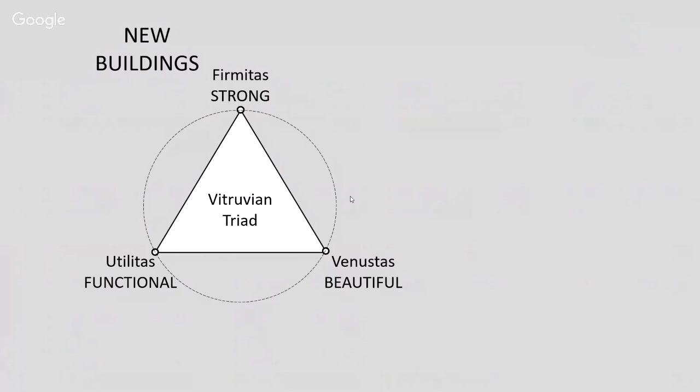Although he was the architect of the emperor, so he didn't have much concerns about the cost of the building. And also, they were not concerned about the environmental impact or energy efficiency or the sustainability of the building. So maybe a new rule can be added in our recent world that a building should be sustainable, which translates as it should be economic, cost efficient, energy efficient, and environmentally friendly.

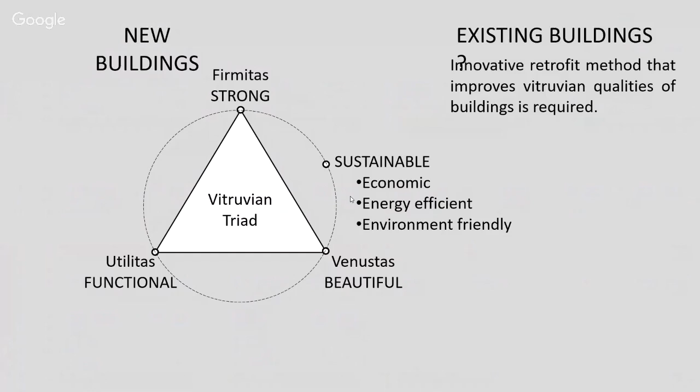While this is true for new buildings, how about the existing buildings? Maybe an innovative retrofit method that improves these qualities should be required, because generally when we retrofit a building, we interfere with the building too much. And although the building becomes stronger, it is not necessarily economic or energy efficient when we use conventional retrofitting methods. So which type of buildings should be retrofitted?

In our studies, we generally concentrate on governmental buildings, like schools, hospitals, or other types of governmental buildings, because these buildings are more important than other buildings. I don't mean that residential buildings are not important, but what I mean is during a disaster, a school contains lots of students. They're important for us. And after a disaster, a school building can be used as a shelter.

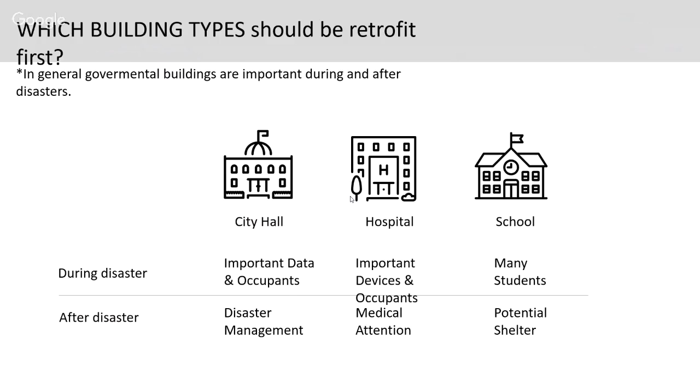So that's why these buildings have priority to be retrofitted. Let's start with an example. This is a very typical school building in Turkey, and there are thousands of similar buildings built with similar plans in many parts of Turkey.

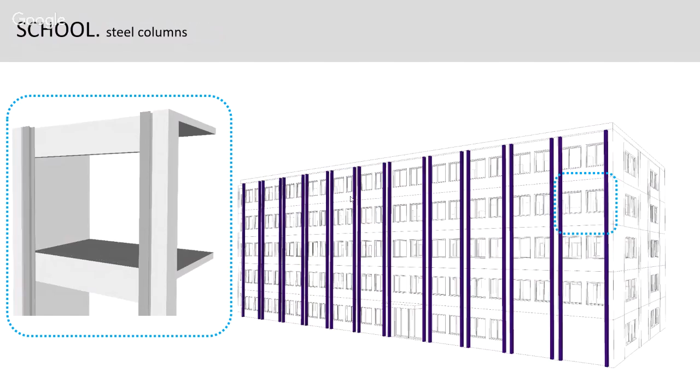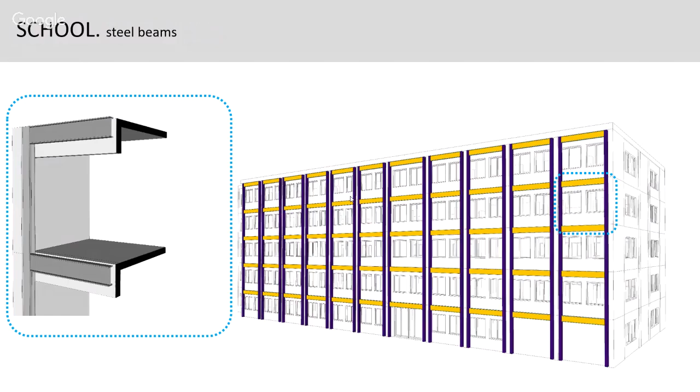So what I mean by external retrofitting is this. Say, this is the model of the building. First, this is one of the options: we install steel members along the columns, the existing columns of the building, from outside, and then the beams are introduced. These are steel beams also attached to the existing beams of the building, also from the outside of the building. And then, in this example, this is a buckling restrained brace, a special type of brace which can dissipate seismic energy during an earthquake motion.

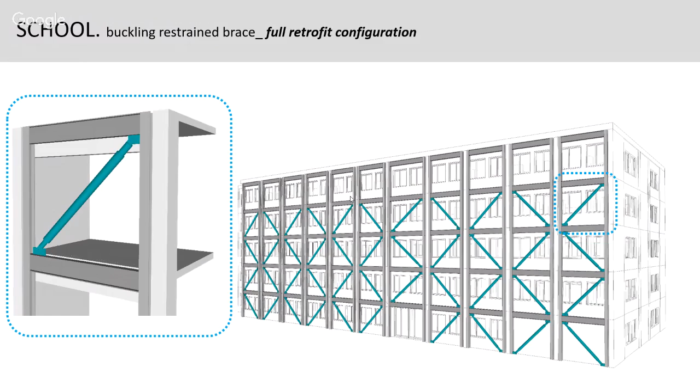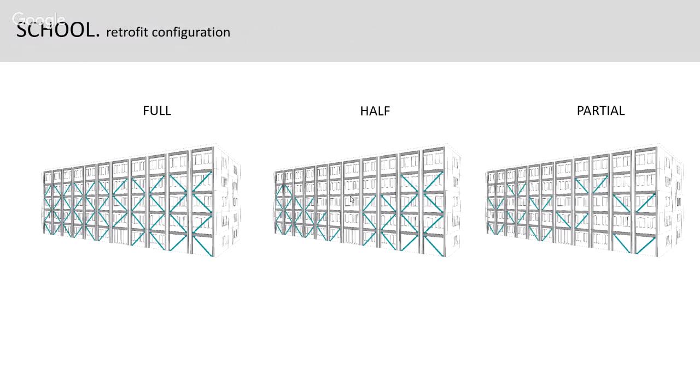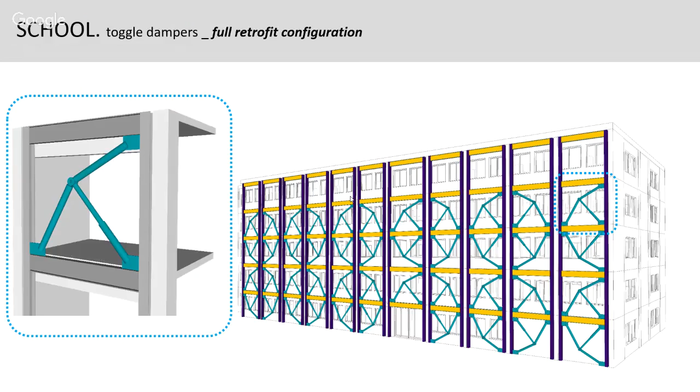External retrofitting improves seismic performance and makes minimum interruption to the occupants or business in the building. If it's a school, it can keep working as a school. If it's a hospital, it can keep working as a hospital. There is a slight noise problem, but with new tools we can reduce the noise during application.

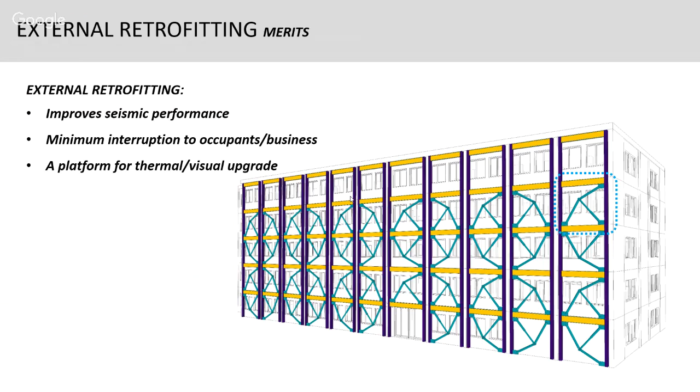This can also be a good opportunity to improve the thermal performance and visual appearance of the building, since we have already installed a new facade. This is actually a new opportunity: now that we have new construction outside the building, we can add a new facade to improve its visual and thermal performance.

This is one example completed at Istanbul Technical University, in collaboration with Tokyo Institute of Technology, Takeuchi Lab, and Nippon Steel as the manufacturer of the BRBs. This frame is the same frame, in almost the same scale as the school building I just showed you, using the same materials and aspect ratio. BRBs are installed in this frame, and seismic motion is simulated using this experimental setup.

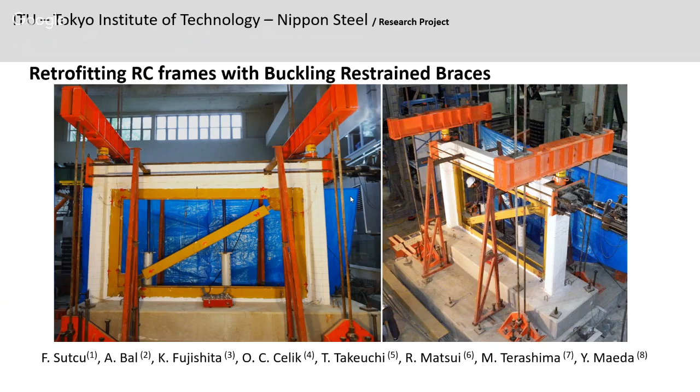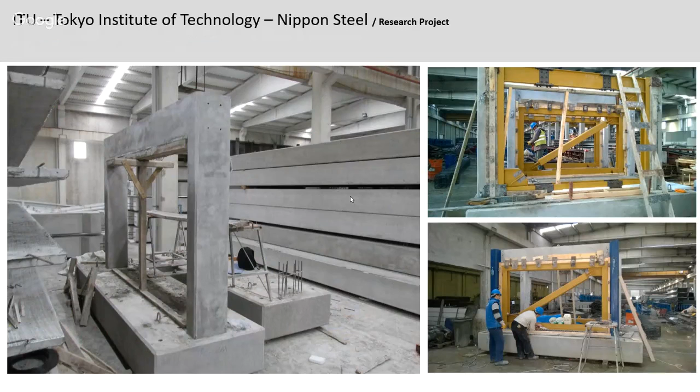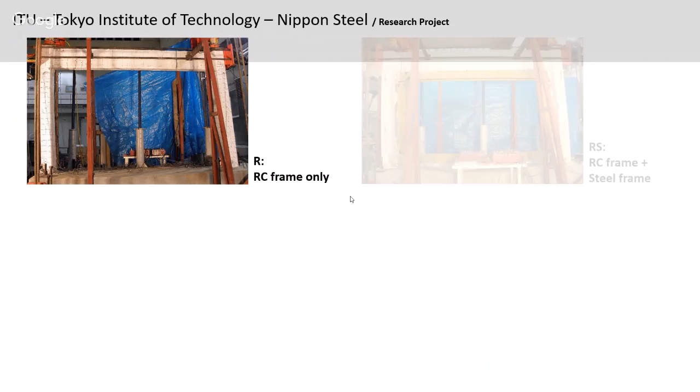We built these frames in Turkey using Turkish technology, just as they were built in Turkey, while all the BRBs and steel members were imported from Japan for this project. First we tested the RC frame only, then added the steel members and tested again, and then the BRBs were added.

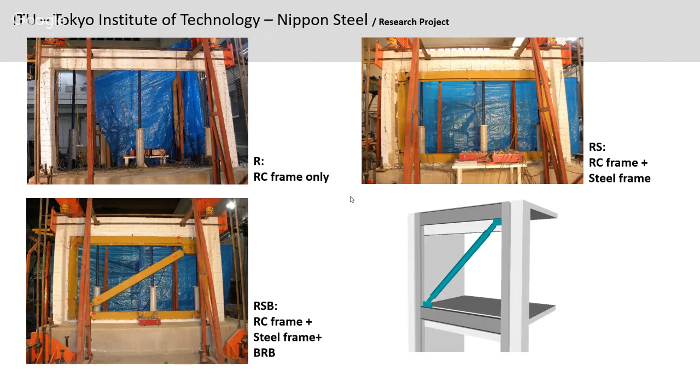Another application: this frame is concentric within the building frame, within the building plane. We can also use an external type, like this one, where you can see the frame added from the outside of the existing frame. And these are the performances.

I won't go too deep into this, but you can see that in the RC frame, the stiffness is quite low. After the steel members are added, the stiffness gets higher and shows some energy dissipation. Later, when the BRBs are introduced, the seismic energy is dissipated by the BRBs, and when the BRBs are introduced externally, the performance is more or less the same.

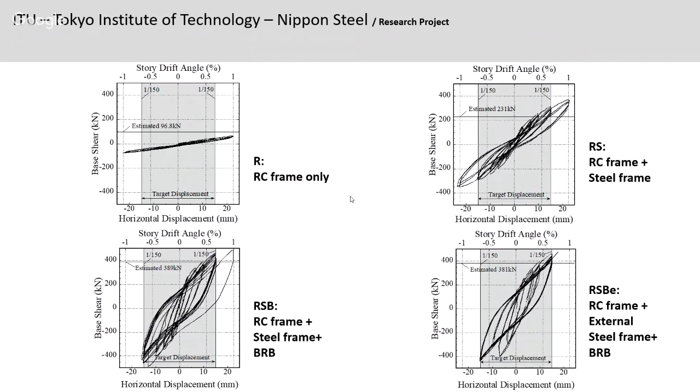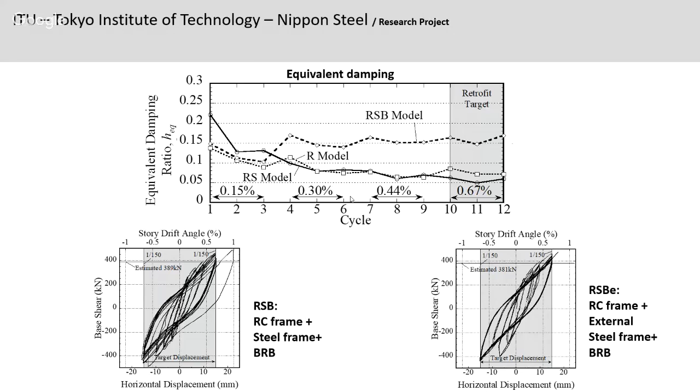This is an example about the equivalent damping. Before the retrofit, in the reinforced concrete frame, the equivalent damping is approximately 5-6%. After the BRBs are introduced, approximately 15% damping is added, which is quite valuable during the design of this building and retrofit studies.

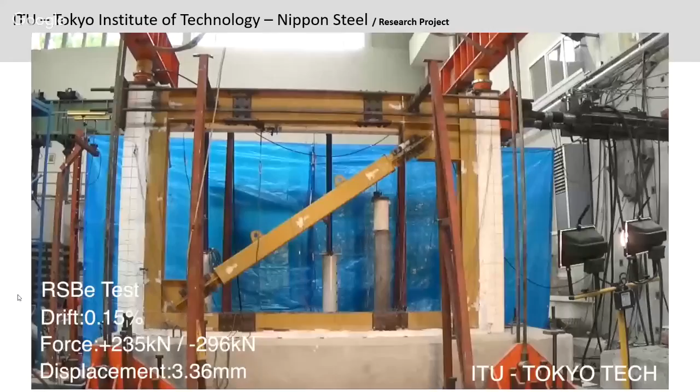I will show a small video of the BRB tests. Here, during the loading, you can see the BRB has a steel core inside the tube, and it stretches along with the loading protocol. Here we have reached almost 1% cycles. Here you can see the stretch. All of the energy is dissipated by the BRB core, the steel core, and you can also see the cracks distributed along the reinforced concrete members.

Here is an application in Japan, at Tokyo Institute of Technology, the Midorigaoka 1 building. I worked on this building for almost 2 years. This building was built around the 60s. The concrete quality is questionable, and the structural system is fairly good, but it needed retrofit.

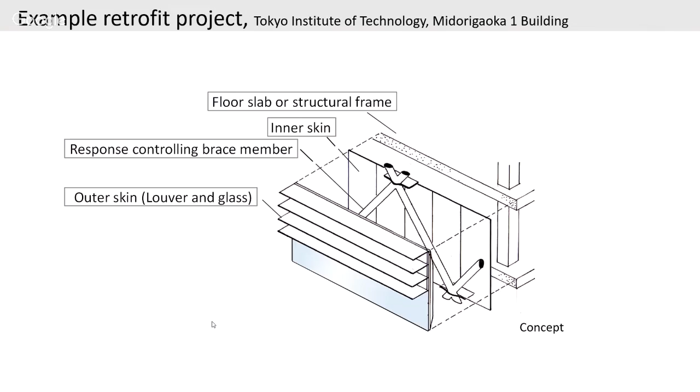The proposed method was to add BRB members outside the building along with some louvers, which improve the thermal performance and also the visuals of the building. These are some application photos, and this is the final condition of the building. Now this building is safer and stronger, but I believe it also looks more beautiful, which is proven by a design award given to this building, shared by two professors in Japan. I use these images with the permission of Professor Takeuchi.

By using louvers, this is not seismic, but it's an opportunity to improve the thermal performance of the building. In summertime, the louvers cut direct sun radiation, but in winter, they let more sun radiation inside the building, increasing its thermal performance.

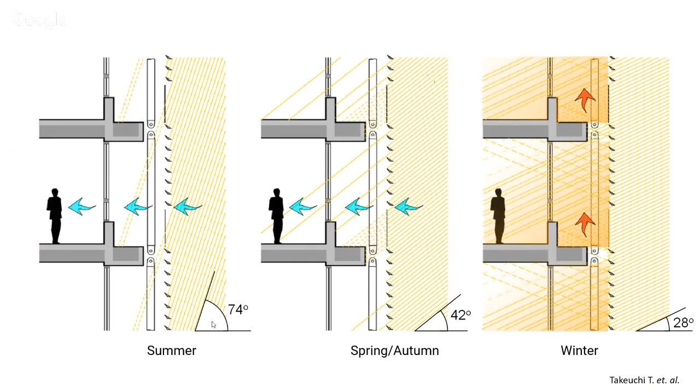This kind of analysis is also done in Turkey. Please remember that this analysis is made by architects in Turkey, while in Japan it's made by structural engineers. That's the slight difference. Computational fluid dynamics analysis is made to see the effects of the added facade on the building.

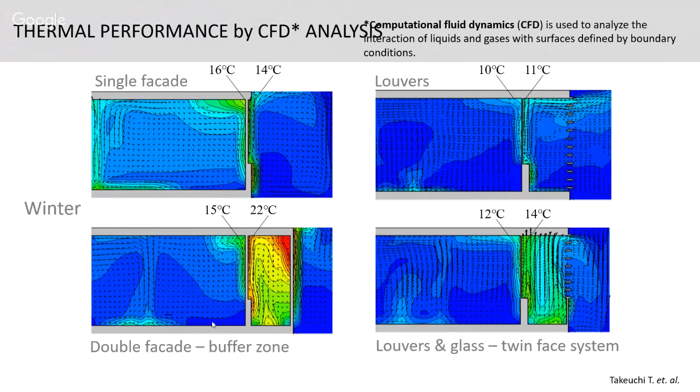So when you have louvers in front of the building, you will have a thermal buffer between the building and the outside environment.

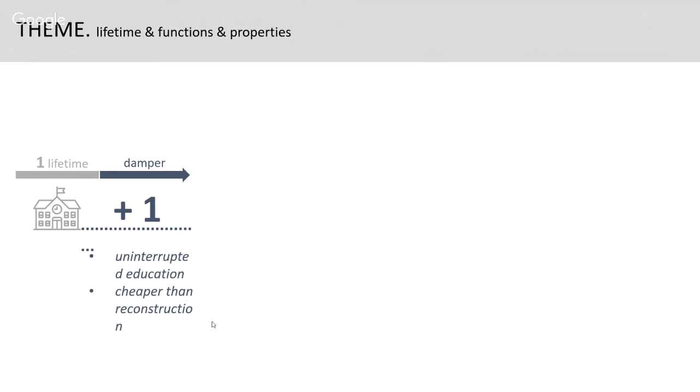So what we do here is, say the building has one lifetime, and instead of demolishing and building again, we retrofit the building and give it another lifetime chance. This can be considered as recycling. We recycle the building, we use it again by retrofitting it.

Also, when a new facade is added, the building is visually upgraded and daylight effectiveness is improved, etc. But meanwhile, we should be aware that this application should be done carefully, where the dampers are accessible and easy to clean. The seismic resistance of the facade is also important—the building may be okay, but the facade should also be seismic resistant.

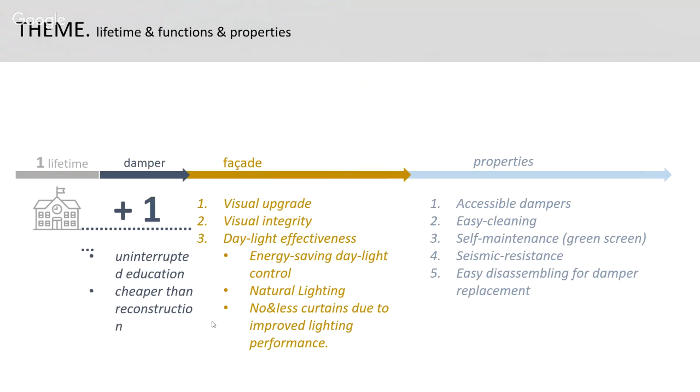In case you need to change or replace the dampers after a big seismic event, it should be easy to disassemble this facade and install new dampers. So this is kind of a concept study—we recycle the building, we upgrade the building. This can be called an upcycling concept.

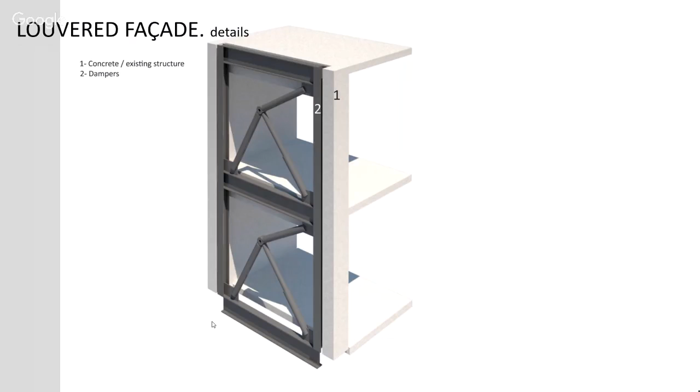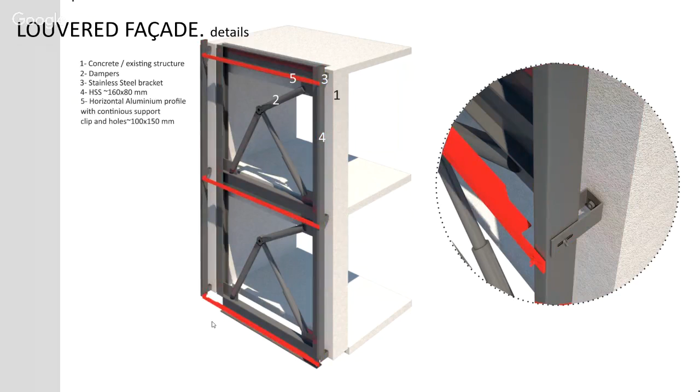There are many facade proposals; here I'll show you one of them. Say the building is externally retrofit by a kind of damper—it can be BRBs, oil dampers, or any kind of damper. Then a new and simple modular system is introduced from outside the building, and a new facade is added. These are all modular members, and they can be removed easily in order to access the dampers.

Another alternative is to add a kind of mesh outside the building. This can be used for green screens, like a plant-type facade. It should also be easy to remove this kind of grid or mesh type facade.

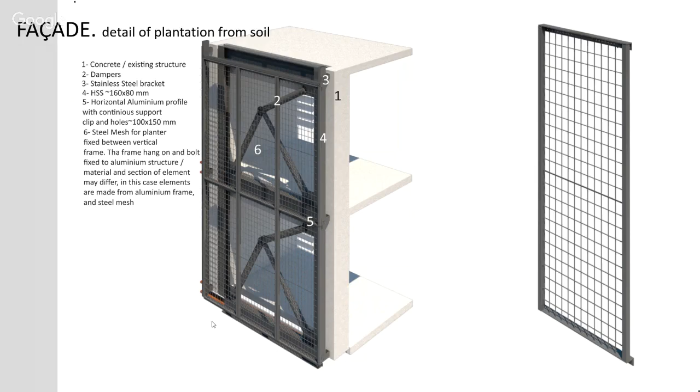Okay, this was our first project. In our second project recently, as Istanbul Technical University, we are working with Mayda Corporation and the Turkish Ministry of Environment and Urbanization for another external retrofit project. This is called Master Frame Retrofit—simply adding a new reinforced concrete frame outside the building.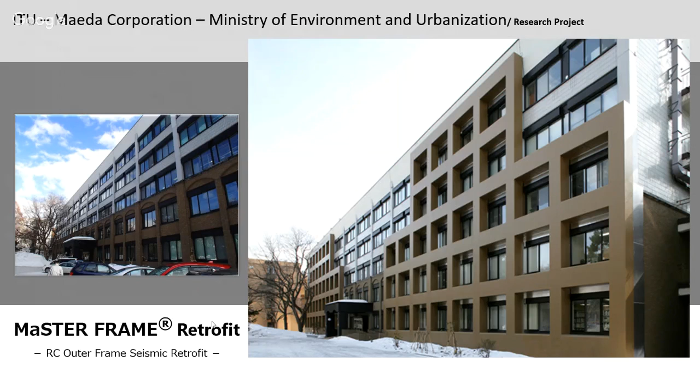This system is widely used in Japan for retrofitting buildings externally. What we do is install the new frame, which is just a conventional reinforced concrete cast-in-place frame. We install it using special disc anchors developed in Japan.

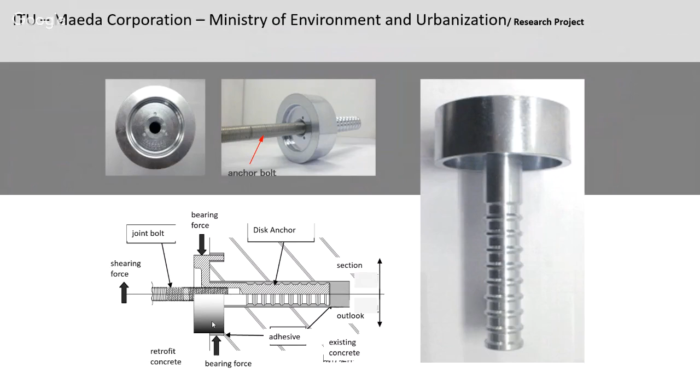Recently at Istanbul Technical University laboratories, we are doing shear and pull-out tests of this special type of anchor. Because of the disc head of the anchor, the shear capacity is quite larger compared to conventional anchors, which means fewer anchors are needed. That means the application time is shorter, it will be economical, and the noise will be much lower. And these are the tests—I will briefly show you some of them.

And here in this setup, we are using this setup for doing the pure shear tests on the disc anchors. After the shear capacity is confirmed, we do a pull-out test to see the pull-out capacity, the residual pull-out capacity of these disc anchors.

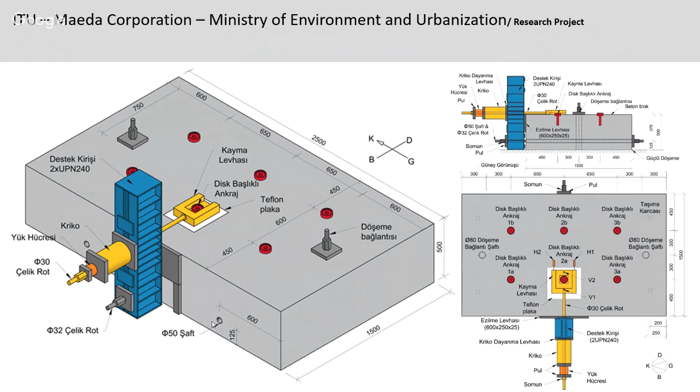Because after a seismic event, when the disc anchors are subjected to lots of shear force, and after the seismic event is finished, we don't want the frame to disintegrate from the building and fall down. So even after shear capacity is reached, we want to show that these anchors still have residual pull-out capacity. We have already shown with some tests that these anchors have lots of residual pull-out capacity, so they are quite reliable anchors.

These are some photos from the test that we have already completed. I also would like to mention that these tests are conducted on several types of concrete grades. In this first test, we used an 8 megapascal concrete block, which is quite low, and it is already shown that these disc anchors show quite good performance on even low strength concrete.

In the coming tests, we will use higher grades of concrete like C12 or C16, which is widely seen in the building stock in Turkish school buildings or other governmental type of buildings. By the way, even though we are concentrating on school buildings or hospital buildings, it is also possible to use this kind of external retrofit technology for residential buildings or any type of buildings.

The only point is that these buildings should be regular in plan. As long as it's regular in plan, it is easy to attach a single monolithic frame from outside and improve the seismic performance of the building.

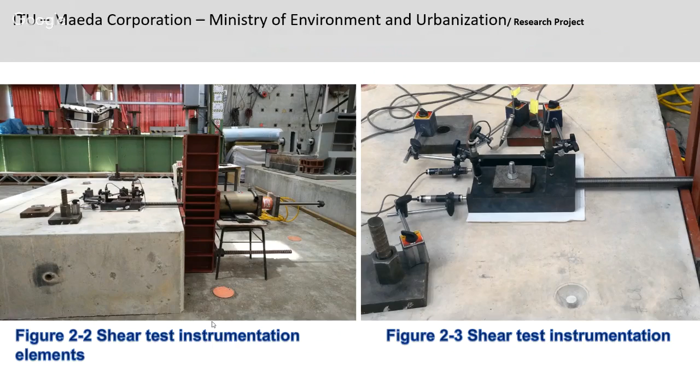And we are also doing some nonlinear performance analysis on the building models by using this external master frame retrofit technology. We have already completed most of our study, and hopefully next week we will visit Japan and meet with JICA, because the sponsor or the supporter of this project is JICA.

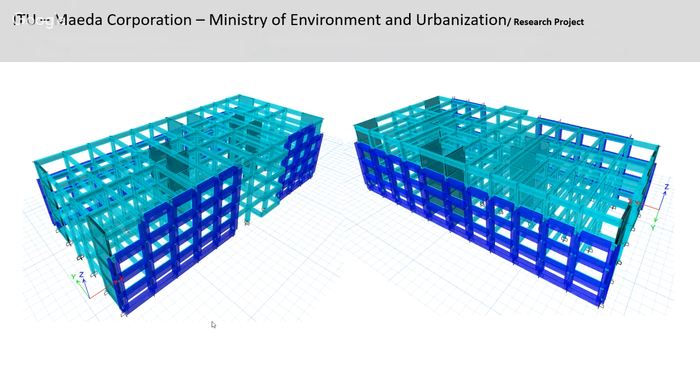We are also conducting some research on this external retrofit technology. This is a patented technology by Japanese Kurosawa Construction. PCaPC means precast post-tensioned concrete. This frame is, first of all, precast, prefabricated, and brought to site and attached with each other and also with the building by using post-tensioned bars.

It is similar to the previous technology, but there are some differences performance-wise and cost-wise. The important point here is that we see that in Japan, many external retrofit technologies are developed, and we need such technologies to retrofit some school buildings while there's education inside.

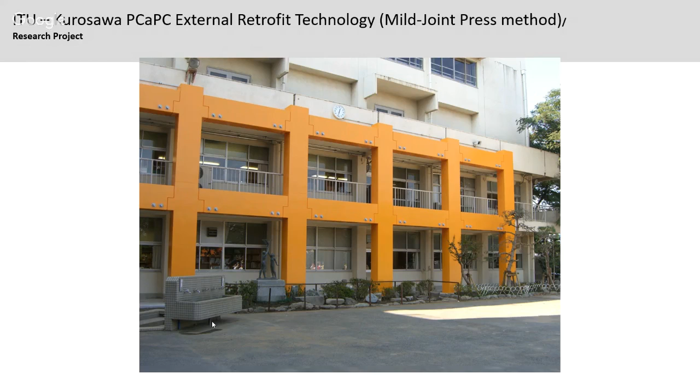Because in Istanbul, maybe it's possible to evacuate a building and move students to another school for one year or two years, and then you can retrofit the building or rebuild the building. But in many cities or towns in Turkey, it is not possible to remove all the students and stop the education for several months while you are doing the retrofit works. So in that kind of buildings, we need this kind of technologies without interruption to the occupants.

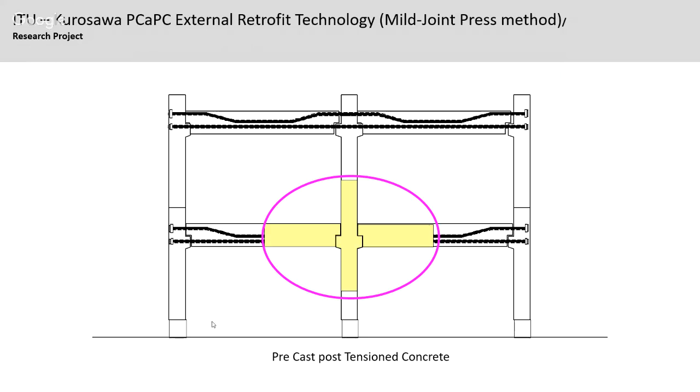And yeah, this is a very simple figure about the post-tensioning technology. All the members are disassembled and brought together, attached by post-tensioning bars, and the retrofit studies are complete.